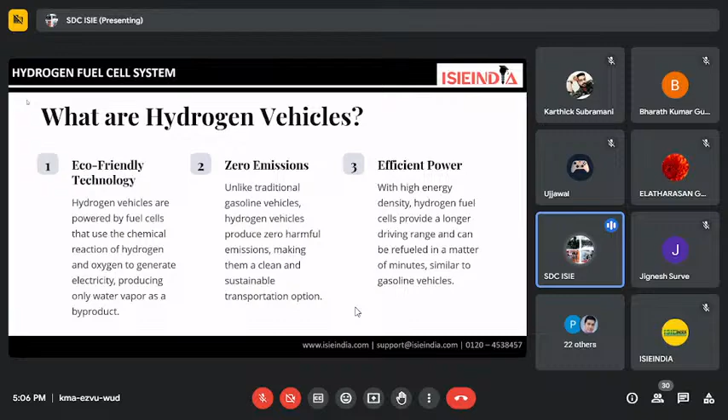Fuel cell vehicles are very similar to electric vehicles because they have a combination of EV powertrain plus fuel cell technology. The transmission powertrain components are very similar to EVs, like battery, controller, connections, each having different functions. But the power that you store in the battery comes with the help of the fuel cell stack membrane. Starting with the powertrain, we use a motor to convert electrical energy into mechanical energy, which is connected with the transmission axle, transfer case, gearbox, to propel the wheel as per the required speed.

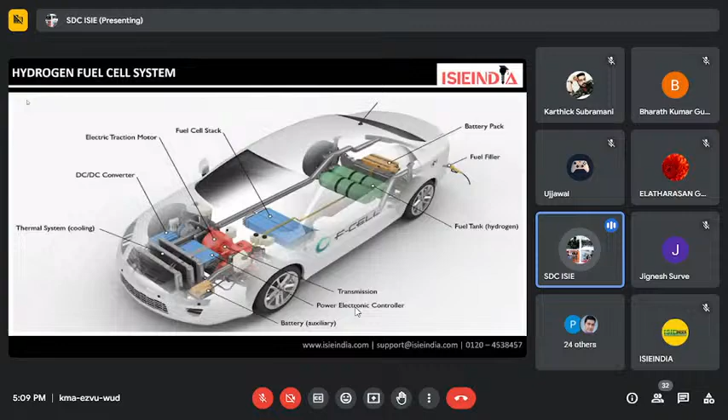So it's very evident, so we start with how does a hydrogen vehicle work. First comes fuel cell operation, which is going to generate the power. Second, electric drive, like we are using a controller, then a motor to convert the power and provide it to the motor, and it can help propel the wheel. Along with that, in all the operation, we are getting water vapor emissions, and we are also getting heat. So to understand that, we start with the fuel cell.

A fuel cell is a chemical energy conversion where we are using hydrogen and oxygen to produce electricity through an electrochemical reaction, and that energy is going to be stored in the battery. The electricity which is generated with the fuel cell operation is not directly used by the vehicle. It is going to be stored in the battery, and we are going to use that.

You are going to store that energy in the battery, and also during the running of the vehicle, regenerative braking is there, so that power is also going to be stored in the battery. Then from the battery, as per the requirement of the motor rating, we are going to step the voltage. If we need a DC-DC boost converter or buck converter, we are going to require the full output from that. And then we come to the electric drive, where it's allowed to move with high efficiency and low noise.

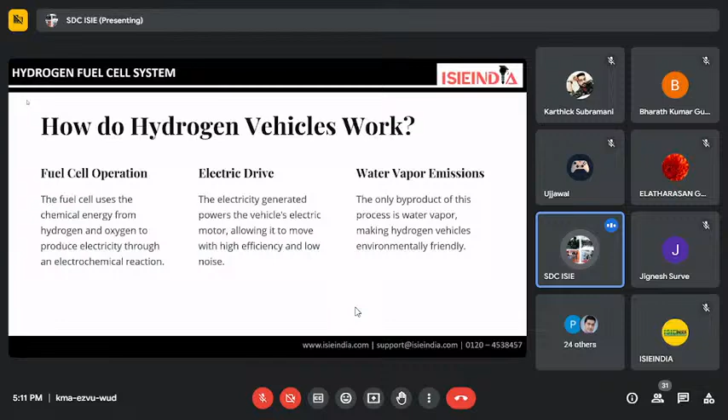And in this whole operation, we are getting water emissions. So we start with the fuel cell. What is a fuel cell? A fuel cell is very similar to, you can say, a battery. Like in the battery, we also have electrolytes, anode, cathode.

It's very similar to that, but the raw material substances are different, like in lithium cells, lithium ion is the main component. In a fuel cell, we are providing hydrogen as well as oxygen to make an electrochemical reaction, and from that we are getting energy generated, which should be stored. It can be connected in series connections, and we are getting a 370 volt output from the full stack, a prototype model. I will show you one of the case studies as well.

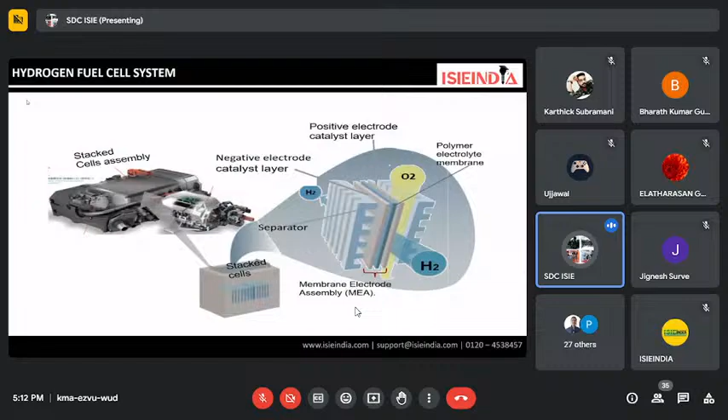With the help of oxidation and reduction processes, some of them have chemical equations and chemical compoundation, and we are getting the energy. So this is part of one of the four-wheelers. You can see that stack cell assembly, and these stacks have a stack membrane. In that membrane, we have a lot of different fuel cells, and these cells are connected in series. They also have positive electrodes and negative electrodes, and between them we have membrane electrodes, where we are getting the power supply. So I will show you one of the animations as well for that.

At the anode, hydrogen molecules separate into protons and electrons. Along with that, a proton takes a different path toward the cathode, and we are going to regulate that.

You can see the flow of hydrogen from one side, the anode material, as the conducting negative terminal, as well as the cathode, which is connected as the positive terminal, with the reactions occurring between them. A gas diffusion layer is created between them, and the electrons go through the external circuit, creating a flow of electricity, while the protons migrate through to the cathode.

At the cathode, the protons utilize the oxygen, and with the help of gas diffusion systems, we are getting positive energy, or you can see the flow of electrons between them, and we are getting energy. That energy is firstly stored in the battery, and then we use it to propel the wheel or any other peripheral device. This is used in electric vehicle transportation, in hybrid mode, but it's also widely used in power stations for backup power supply and for other parallel scopes of the market in automation.

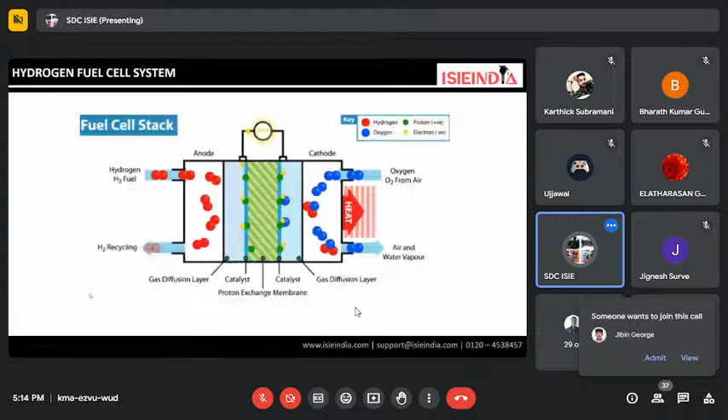So firstly, I can explain with the block diagram. We start with the fuel cell, which we connect with the EMS, the energy management system, a complete energy management system shown by a single dotted line, indicating a unidirectional flow. Along with that, we have a DC side where electrical energy is transmitted, and the bolder sign symbols represent the mechanical transmission in the vehicle.

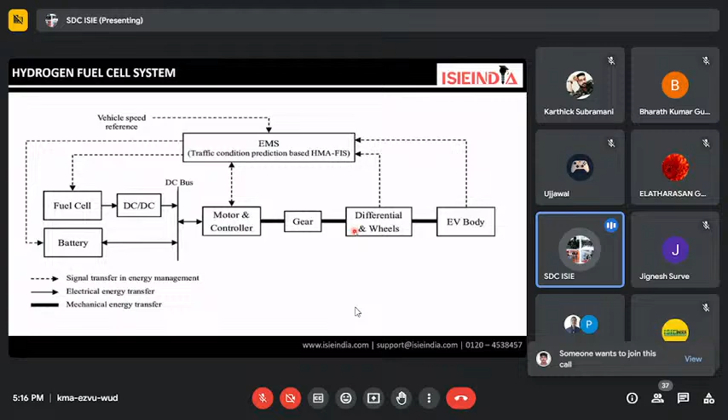So we're starting with the fuel cell. How the fuel cell will be stocked, it's filled from outside the vehicle through charging infrastructure like hydrogen stations. You get power after the electrochemical reaction, which is stored in the battery with the help of a DC-DC converter. We have a buck boost converter here, and we store power in the battery, as well as through regenerative braking connections with the motor. At that time also, power is stored in the battery, and when we need to run the vehicle, the battery draws power which is controlled, and with the help of the motor we propel the gear through the differential. From the differential it propels the wheel. So this is how power is transmitted from the fuel cell to the EV body.

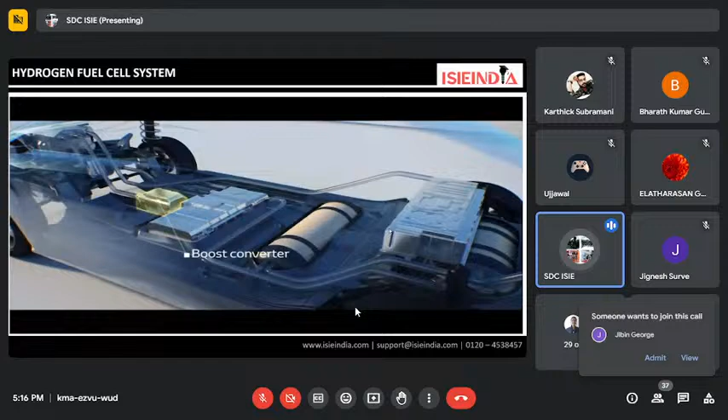I will show you a video that gives a complete explanation. This video is about a fuel cell announced by Toyota, the 2015 Toyota Mirai, and it gives a clear explanation about how the cell membrane works and how efficiently it delivers power. You can see the power electronic components, powertrain components, as well as the fuel cell technologies in this same video.

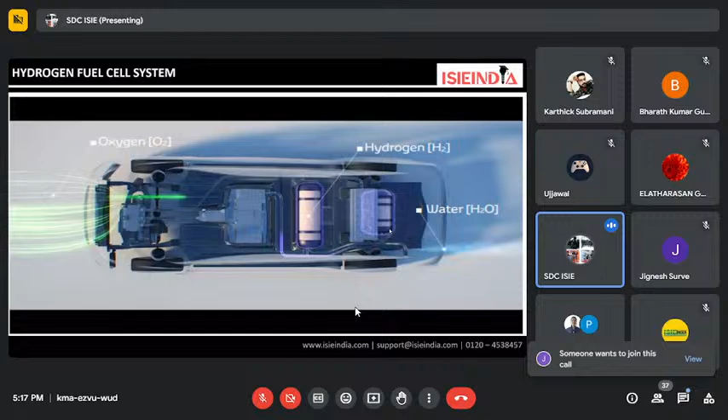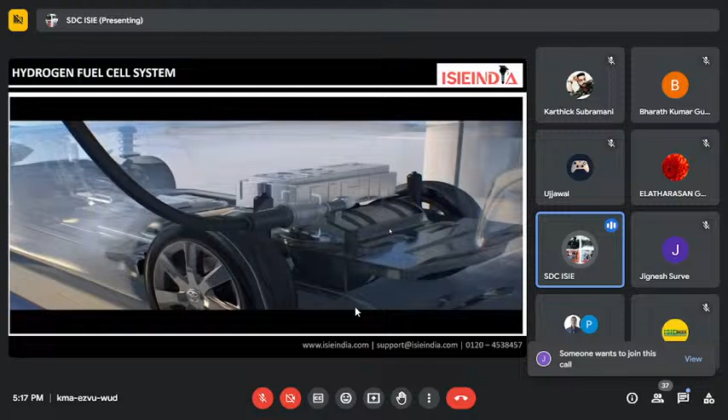So we provide oxygen and hydrogen through air passages, and the hydrogen can be refilled at charging stations. We also have to work on the charging infrastructure, similar to EVs, for hydrogen, but we need more safety precautions with the hydrogen substations.

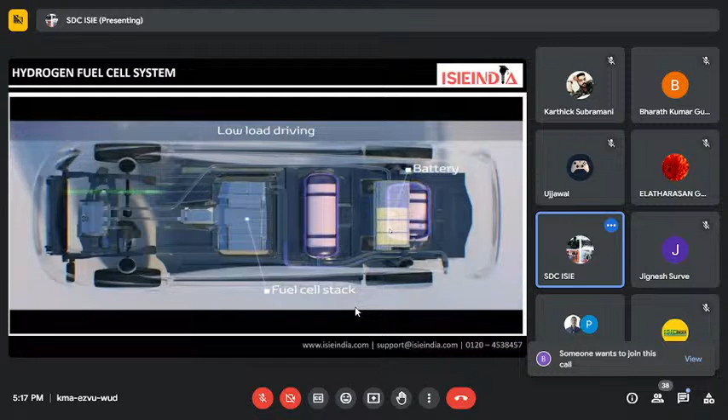So you can see that power should be delivered whether uphill or downhill, as the power required differs for high load driving or low load driving. It can be circulated and suited for that with low noise configurations. These are the major components in the fuel cell. It's also a part, you can say, of the hybrid part of the electric vehicle.

At the time of energy recovering, it's also there, but nowadays energy recovering isn't directly there. We have a regenerative braking system working with smooth configurations. But the fuel cell membranes, you can see a lot of membranes are there. It has 370 cells in this particular module.

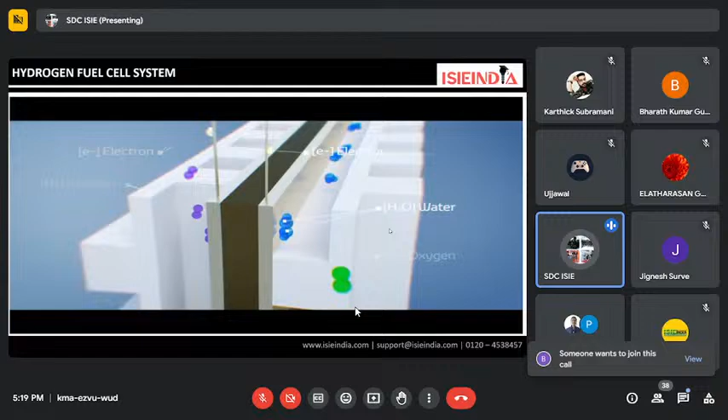Due to the positive and negative electrolytes, we get a flow of electrons from one side to another, generating power, and that electricity should be stored in the batteries as required, as per the desired rate. We convert it with PI controllers and power electronic converters, and use that power similarly.

So let's start talking about the advantages of hydrogen vehicles. One of the most compelling aspects is their ability to produce zero emissions. In electric vehicles, take the hybrid mode as an example, it's very highly costly and some of them do have emissions as well. But in this hybrid model, or a fuel cell model, you can't see any emissions. Hydrogen vehicles offer a cleaner and more sustainable solution.

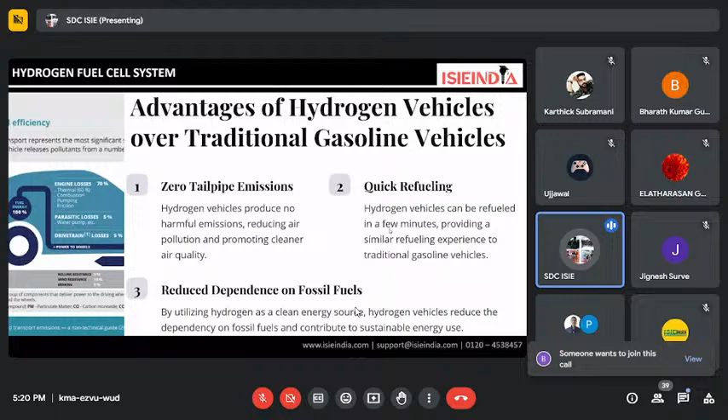There's boosted energy efficiency, excellent performance, and quick refueling, since we're not spending a lot of time charging the vehicle. One of the major drawbacks we find in EVs, or we can say a loophole of EVs, is that we face too much time while charging the vehicle. But with hydrogen, it's very evident: quick refueling takes just about 5 minutes to refuel your vehicle. This reduces dependence on fossil fuels. So quick refueling and zero emissions are the major advantages we see in hydrogen vehicles.

But while the potential benefits are clear, it's important to acknowledge the challenges and concerns surrounding hydrogen vehicles, like their high production cost and limited refueling infrastructure. There are many reasons why we are not using hydrogen as widely as EVs.

Like we are seeing a lot of Nexon EVs, Nexon EV Punch, which are launched by Tata and Mahindra.

But why are we not promoting hydrogen that much? Because of the manufacturing cost. But somehow in upcoming days, we are also seeing some prototypes with high efficient power that are similar, more efficient, and more suitable as compared to EV. It's going to be coming in the market in upcoming years.

Some of the MNC companies and automotive industry companies which are more honorable and trusted by customers, like Tata and Mahindra, are working on hydrogen power plant setups as a backend to promote their vehicles, and it's going to be a great revolution.

Safety concerns are much higher in hydrogen vehicles because we are setting up power for a hydrogen setup, and for the same charging stations, or maybe we have to plan separate infrastructure. So safety concerns are a key factor that we have to address when moving towards hydrogen vehicles.

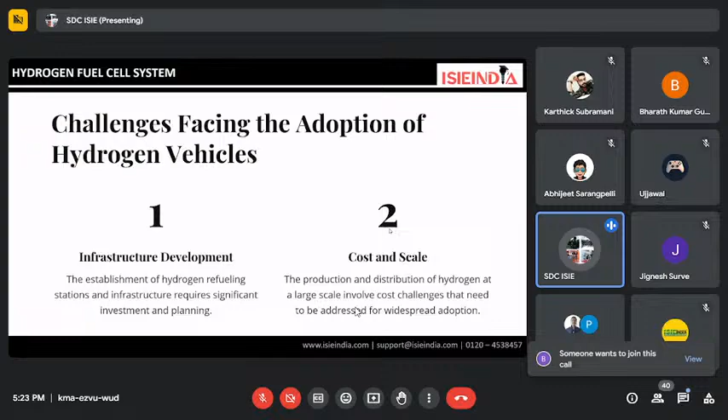So the current state of hydrogen vehicles in the market covers technology advancement, collaborations, investments, and global market penetration. Recent technology advances are addressing many of these challenges. As I told you, these drawbacks of hydrogen vehicles should be rectified in upcoming years through breakthroughs in hydrogen fuel cell technology, leading to improved efficiencies and cost reduction.

The research and development of materials and manufacturing processes bring us closer to something more suitable and economically valuable for the customer, with government support also available. Huge government support is there, in India as well as in the European market, and several manufacturers have embraced hydrogen technology models, like Toyota, Hyundai, and now Honda is also working on that.

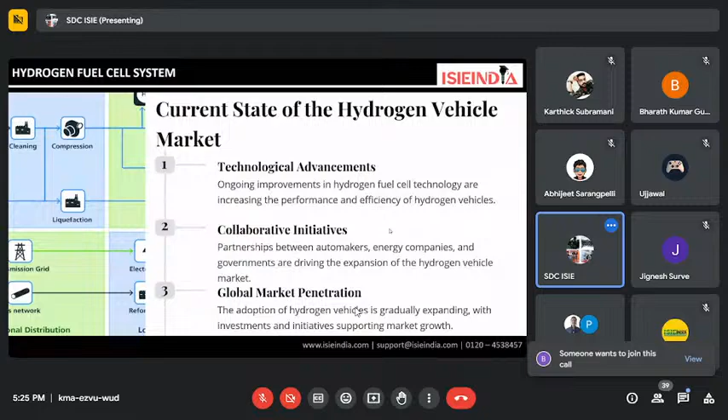So you can see a lot of efficient startups and company investors are there for green mobility. Okay, so I'm going to discuss one case study of a hydrogen vehicle and what spare parts, powertrain, and ratings should be there in that particular vehicle.

As I mentioned, Toyota and Hyundai are among the major companies; around 2013-2015 they launched their vehicles, and they are promoted and performing well in hydrogen vehicles, sustainable transportation, and have a positive impact in the automation field as well.

So I will show you one of them, and what are the parameters: what is the hydrogen tank, which type of motor is being used, what is the efficiency, which type of battery. Previously in many fuel cell technologies, to store the charge we preferred NMC cells.

To store the charge, we prefer NMC cells for energy management and regenerative braking systems, with 370, 320 cell connections. But now lithium-ion batteries are more preferable also for safety. So in this vehicle, we use a lithium-ion battery with a voltage of 310 volts, a battery current rating of 4 ampere-hour, and 1.24 kilowatt-hours.

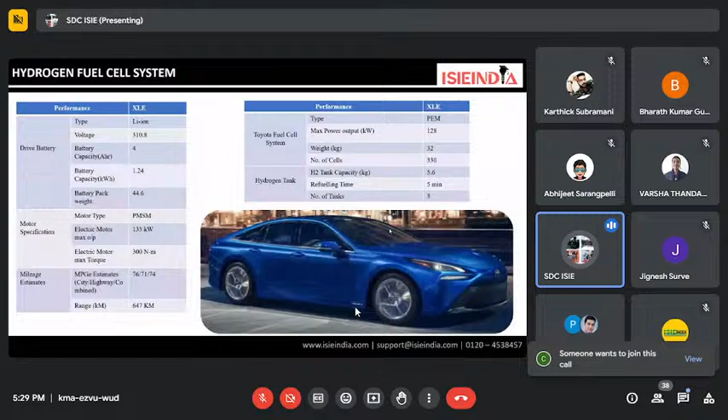So these types of R&D and innovations are going on with hydrogen fuel cells, as well as others simultaneously. We know hydrogen fuel cell is used for buses, trucks - we've seen prototype models for some trucks - but also in some houses in the European market, and for research purposes, NHPC is also using hydrogen power.

Hydrogen power is used where we get power without needing a transmission part, or in power plants or nuclear power plants it's used for backup power supply. So these are the applications where we find fuel cells.

Along with that, these are the future of hydrogen vehicles and their role in sustainable futures. So how will the vehicle be - we already have diesel and petrol vehicles, but why are people going to switch to hydrogen vehicles?

There is a major cost issue, the cost is also high. But in upcoming years we are going to see the cost reduce significantly, because whenever there's a new market scope, the price is high at that particular time. But over some interval of time, with a lot of production and a lot of competitors, we'll see cost reduction, and it creates a huge parallel scope with the IC conventional engine, electric vehicle engine, or hydrogen fuel based vehicles.

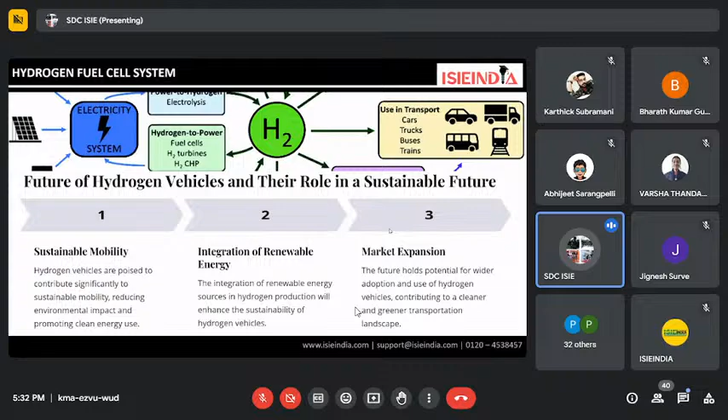So as a future outlook, looking towards the future, hydrogen vehicles present significant steps towards sustainable futures as we navigate the challenges and capacity for technology breakthroughs, the potential benefits, and emissions reduction. When we talk about government incentives, the government is going to promote this, and the potential growth of the hydrogen vehicle market is anticipated with technology advancement.

Whatever advantages we are going to see come with the help of investments along with government help, and global investments are there to widely spread the adoption and promise of the technology with low or zero emissions. That's why we are moving toward e-mobility and more sustainable products.

So when we are talking about India and the government, the National Hydrogen Mission is there. The role of National Hydrogen Mission was to draw up a roadmap for using hydrogen as an energy source, with key focus on generation from green power resources. It can also be a mode of exchange in upcoming years for neighboring countries to link India's growing renewable capacity with the hydrogen economy, which can boost the economy as well.

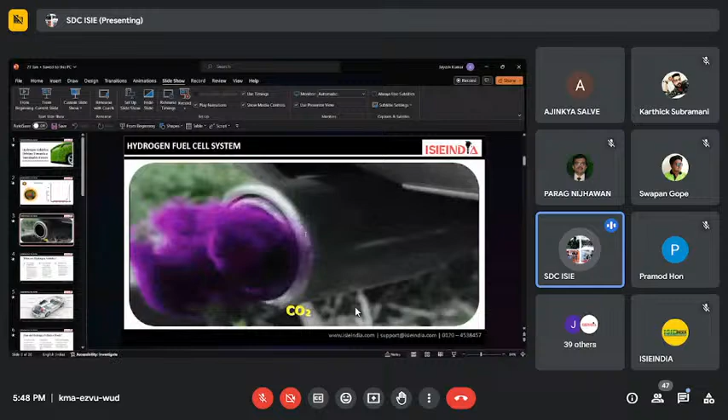No, but in this PPT I included only the basics of hydrogen and what fuel cells are, how it's working. I added one case study in that. In the pictures, in the PPTs, I don't have that efficiency chart.

But can you please tell me, is it efficient, or how much is it efficient, in percentage something? How much percent of electricity is converted to hydrogen, and how much percent we get back as a power source for the vehicle?

Efficiency - he is talking about round trip efficiency. Like, efficiency, I'm not getting it exactly. The exact value I don't have, like I don't have the exact percentages.

So some lump sum figure you can say, having studied in this field? Yeah, it's okay, that's fine. 68 to 69%. I'm not getting the exact value, but it's 68 to 69%. Okay, that's cool, that's fine.

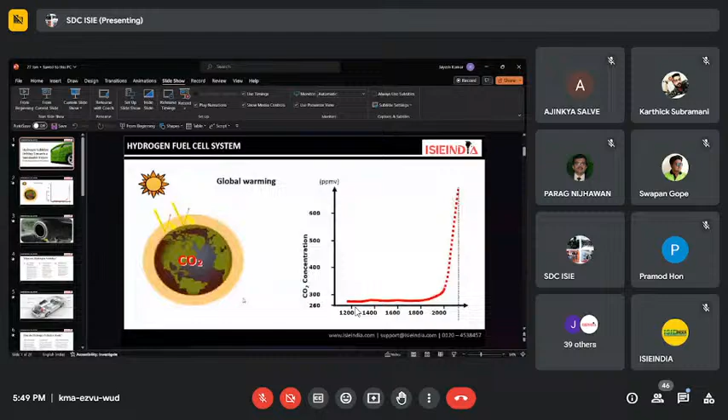Hello. Yes, hello, sorry I joined late. I don't know about your organization or your company. So how does SDC work, or what is it actually? SDC, no, not SDC, something - what is the organization? I'm sorry.

Hello, engineers. Do you also want to expand your knowledge of electric vehicles and secure a good job in the automotive industry? Let me help you get there with our online and offline products. ISIE India has been offering specific domain courses as per industry demands with perks like pay after placement, no cost EMI, placement assurance, and global certification by Automotive Skill Development Council (ASDC) and National Skill Development Corporation (NSDC), Government of India.

We have a range of courses in electric vehicle, computer-aided design and engineering, including postgraduate certification and executive PG program in EV, professional master certification program, specialization programs, fundamental programs, and internship in EV CAD and CAE.

Our postgraduate certification program in EV is specially designed for students, with 120 plus online learning hours and 100 plus hours of industrial projects and internship, giving exposure to various computational tools for hybrid electric vehicle applications. It is a 12-month assured placement course with pay after placement, encouraging learning without financial constraints. The course is globally valid, certified from NSDC, Government of India.

Our executive postgraduate program in EV is specially designed for working professionals who want to upskill or change careers in the EV industry, with 120 plus online learning hours and 20 plus hours of industrial projects. It is a 9-month assured placement course with globally valid certification from NSDC and ASDC, Government of India.

Our professional master certification program in EV, CAD and CAE is specially designed for undergraduate students to pave their career path by providing industry relevant skills, with 100 plus online learning hours and 5 plus hours of industrial projects. It is a 6-month placement assistance course with globally valid certification from NSDC, Government of India.

Along with courses for skilling, reskilling, and upskilling, at engineering institutes across India we are setting up a state-of-art facility, Center of Excellence for e-mobility research and skill-based education, equipped with research and project-based learning-oriented experimental setups. This Center of Excellence is not only for educating students but will also be utilized for research, innovation, and product design and development.

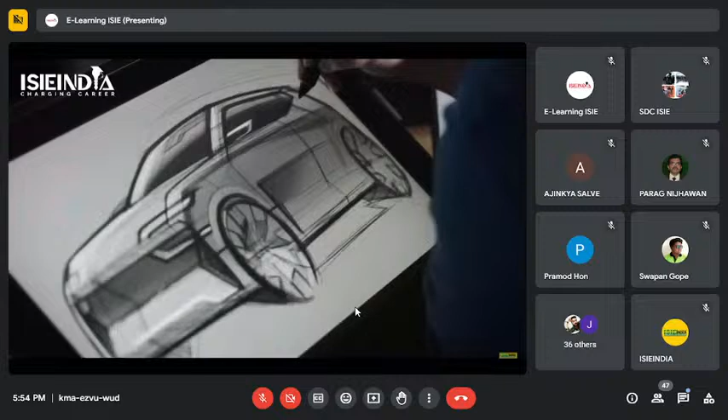It is a combination of 6 labs, including EV powertrain training and research lab, battery BMS training and research lab, EV charging and battery swapping lab, software modeling and simulation lab, innovation lab, and renewable energy lab. Each lab consists of a number of customized workbenches and machineries.

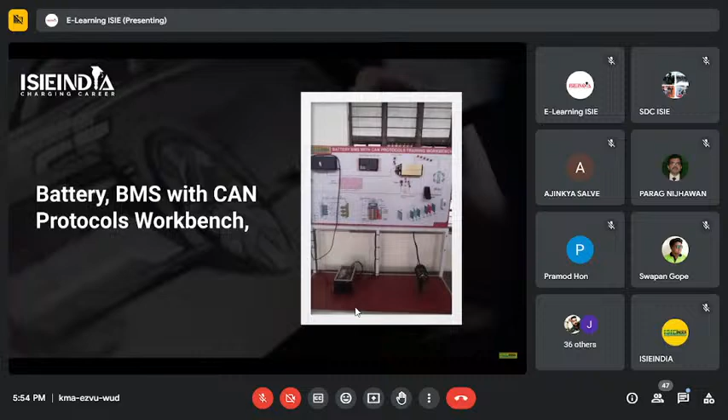A few of them include EV drivetrain experimental setup and motor testing workbench, hybrid drivetrain experimental setup with data logger, EV machine cutout section workbench, two-wheeler, three-wheeler, four-wheeler training workbench, battery load capacity testing, battery BMS with CAN protocol workbench, V2G setup, on or off-grid charging station, battery swapping, autonomous vehicle training workbench, solar power generator and software solutions, and many more.

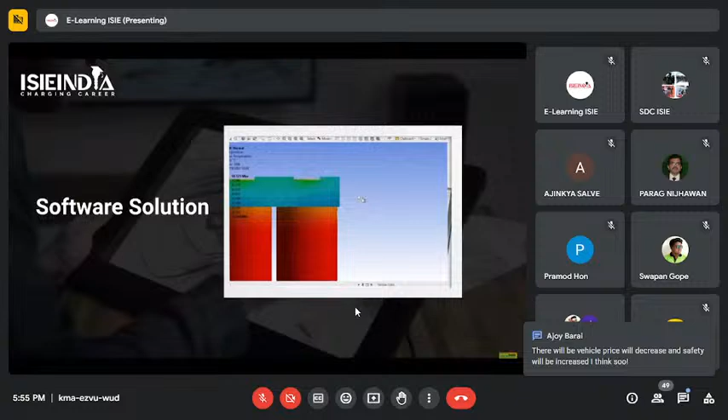No matter from which branch you study, we commit to skill you and assure success in your career. We have spread joy on thousands of faces, becoming their partner along the journey towards success. Join us and take advantage to unlock endless career opportunities.